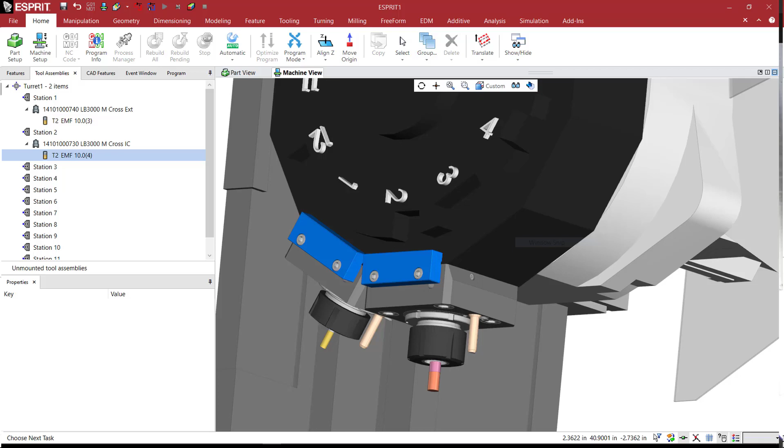Okay, so we're going to create a velocity tool holder. So I just imported this and we're looking at it, and I do not like these colors.

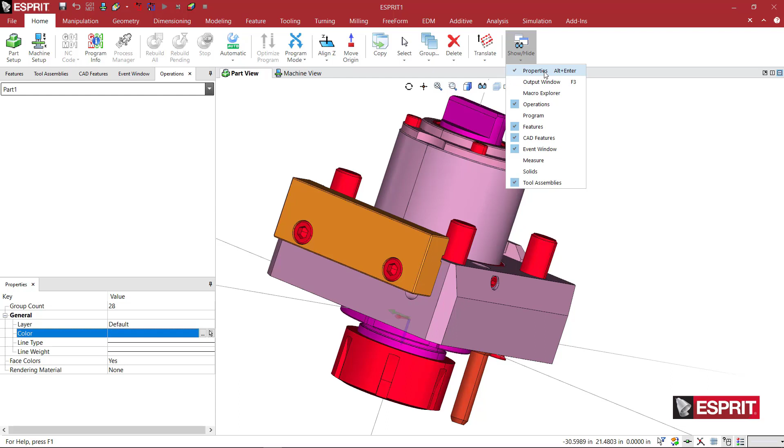So what we're going to do is just right click, select all, and come here to properties—you can view the properties in case you're not aware. Under show hide, you can check properties, or hit Alt Enter. But I'm going to come here and just select gray, and once I do that, my model has been updated to gray.

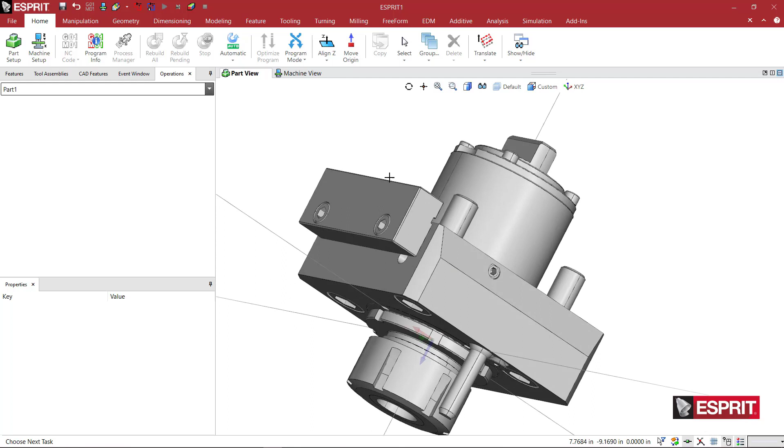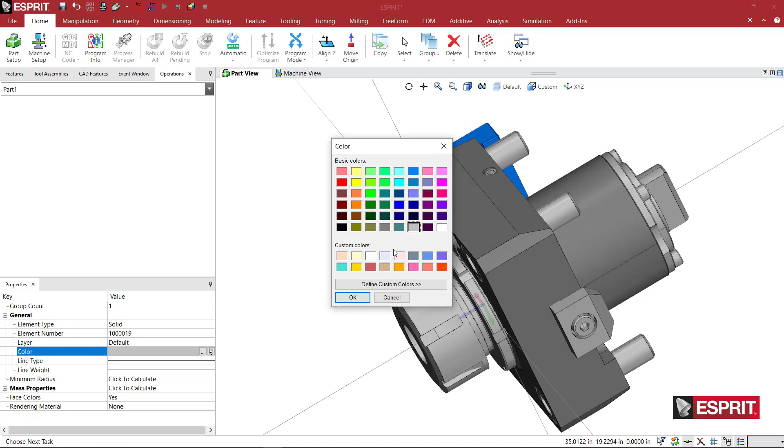Now this is looking a little bit boring, so I want to change some colors from here. Velocity is basically an Okuma product, so what I'm going to do here is make this solid, which is an individual solid, blue, which looks like Okuma. Maybe this body, I will darken that. You can come here maybe on the coolant line, and you know, this is probably going to be brass, so I'm just going to pick one of these colors here. And then on the collet nut, I will come in here and pick like a darker gray.

So that looks pretty good right there. I'm liking that.

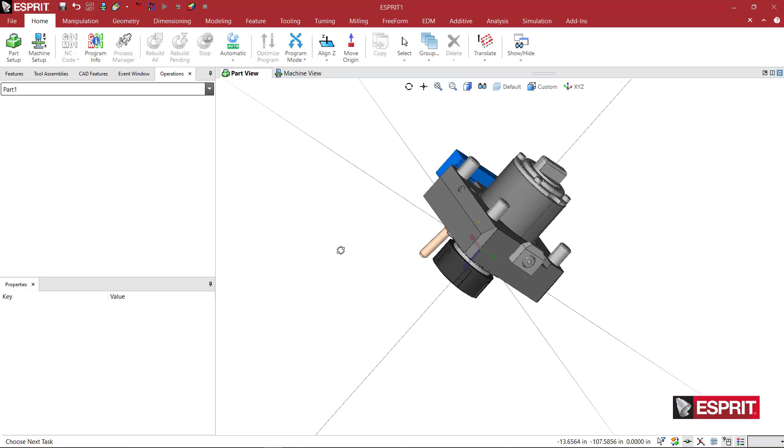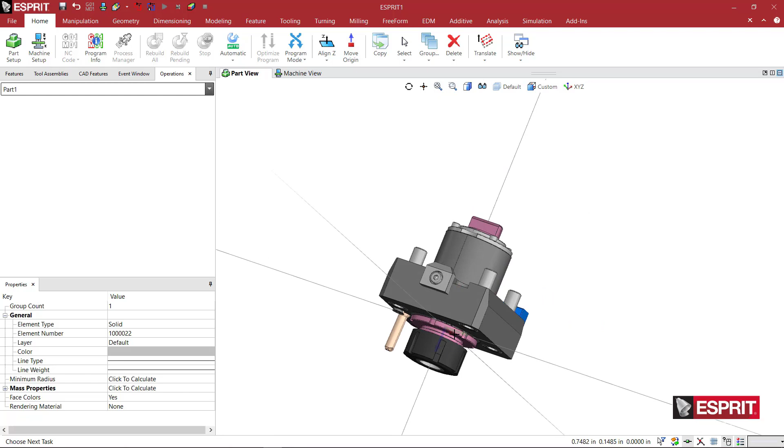Now, some of these are pretty detailed, and these models from Velocity have a lot of extra models in here that are just going to make the file larger—stuff like this, which is going to be up in the turret, so we don't need to keep a lot of these things. So looking at it, if I look at this solid here, this extends through and it's something that's going to be visible, so I want to keep that one. But here, this one, there's nothing that's visible, so I'm just going to hit the delete key.

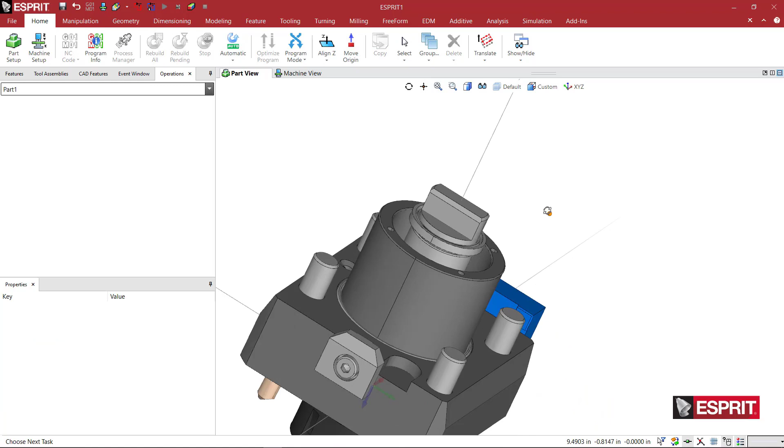These bolts here, we don't need any of these. I'm going to get rid of that one back there—that just kind of trims the file a little bit. What is this one? This one we don't need. And looking down the shaft, we've got a nut in here. We're going to get rid of that. And that's looking pretty good.

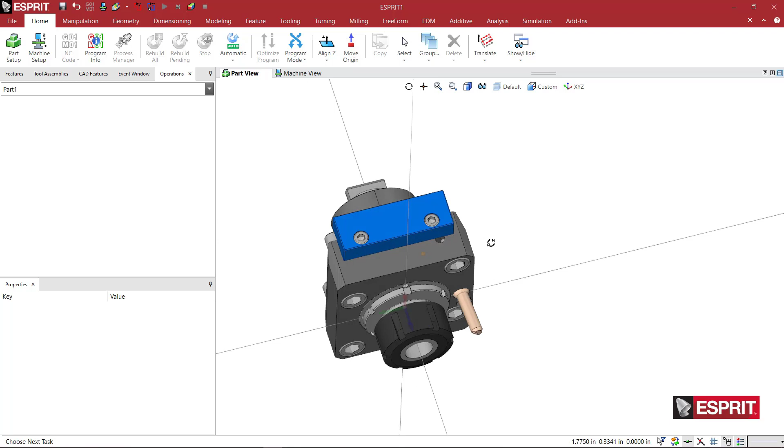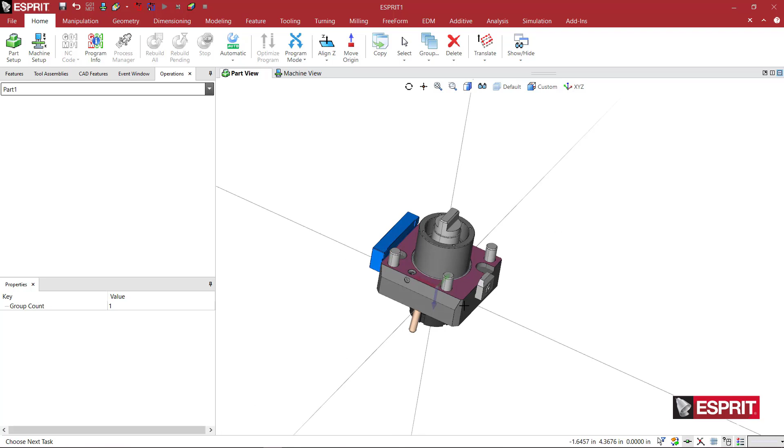Now, you can see here that the UVW positioning of this holder is not correct. This face is going to interface with the flat turret face, so the first thing I want to do is make sure the blue is pointing up into the turret, and the XY plane here is actually zeroed out at this face.

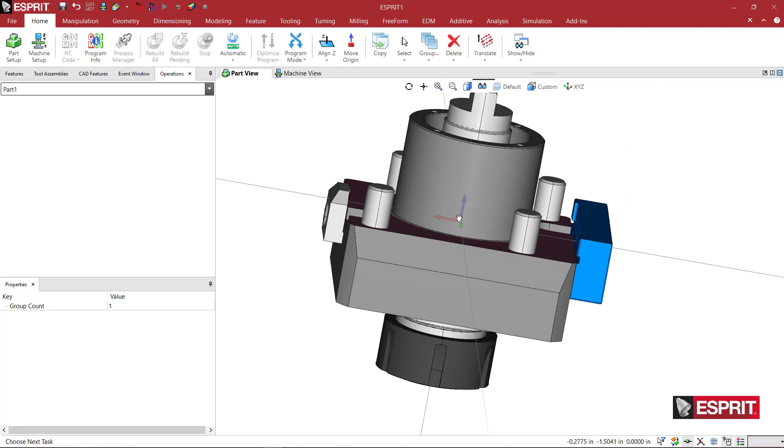So to do that, we're going to use this function here, Align Z. And when I go ahead and click on that, we now see that my XY plane is positioned at the zero point at this face, and my blue vector, indicating the direction into the turret, is correct.

So that's looking good, but I'm not really sure exactly where this model has been positioned by the guys that did the CAD work. So I'm going to pick one of these circular faces here, and I'm also going to hit Align Z one more time, and that is going to center this about the Z-axis, so it's going to slide up into the turret bore correctly.

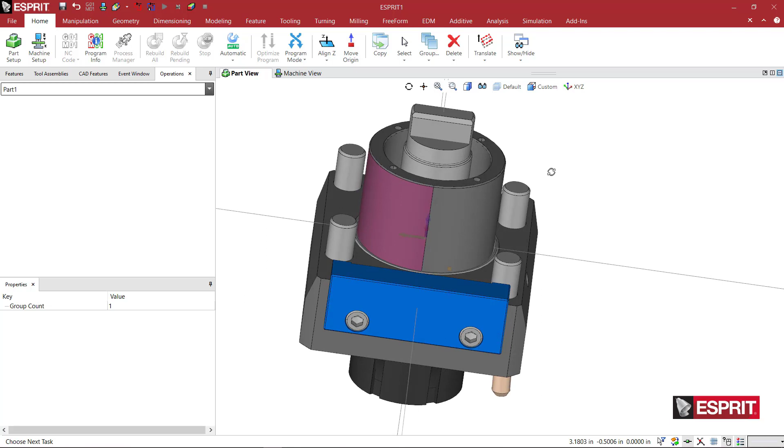Now, usually when I see people's machines and stuff, this is going to be facing toward the main. This direction, this red direction, is going to point toward the main, so it's actually going to be pointing toward the sub.

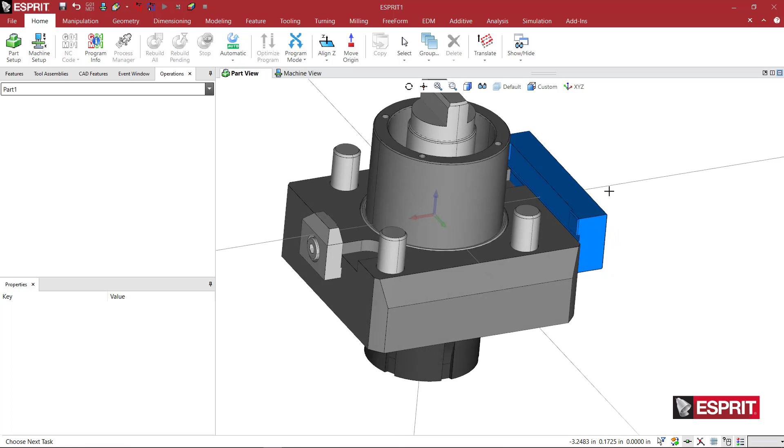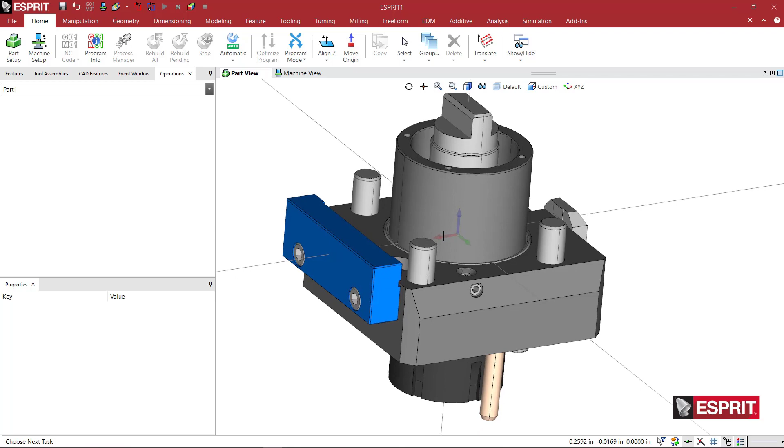So what I'm going to do is just hit right click and say select all, right click again, pick translate. I'm going to select rotate, then move, do a 180, and say OK. So now the red vector indicating toward the main is showing this blue block pointing at the main spindle.

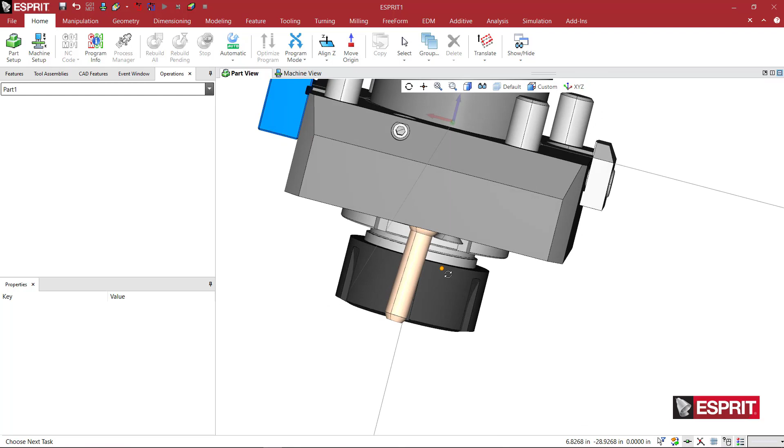And at this point, I want to create my tool spindle axis. Since my solid is correctly positioned now, my tool vector is also in the same orientation as this holder, because this is a radial holder. So what I'm going to do here is just zoom in on the face of this collet nut.

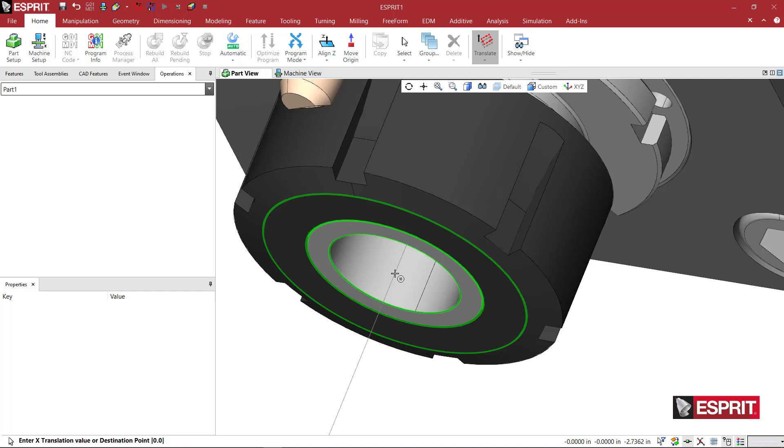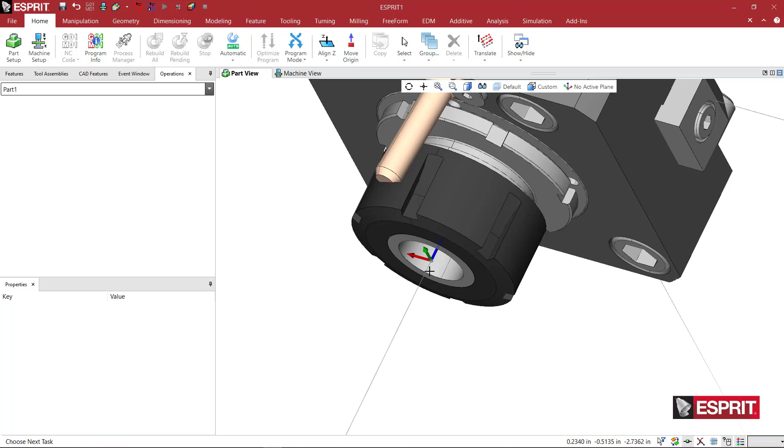And I'm going to pick my translate command. You can pick any of these commands here. I'm just going to pick translate, and then when I move my mouse near the center at the face of this collet, it's going to highlight that. When I digitize with the mouse, it's going to translate my UVW to that center position, even with the face of the collet. So when I create a tool, it's going to appear with the base of the shank right here, with the overhang of that tool, the stick out coming from the face of that collet.

So now what I want to do is just define that using TSA. I did a TSA_1 for tool spindle axis. And really for this holder, you're only going to have the one.

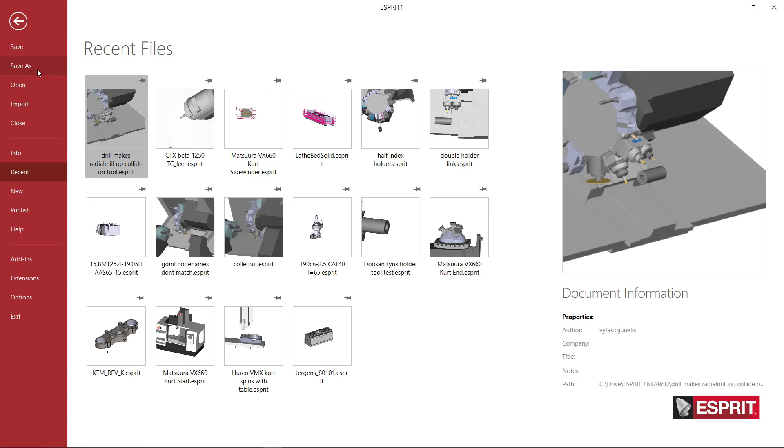And then I'm going to come to File, Save As, and we're going to do a GDML for a holder type. Holder files, GDML. We're going to add it to this folder right here. So we've got an internal collet, an extended collet. We're going to go Save.

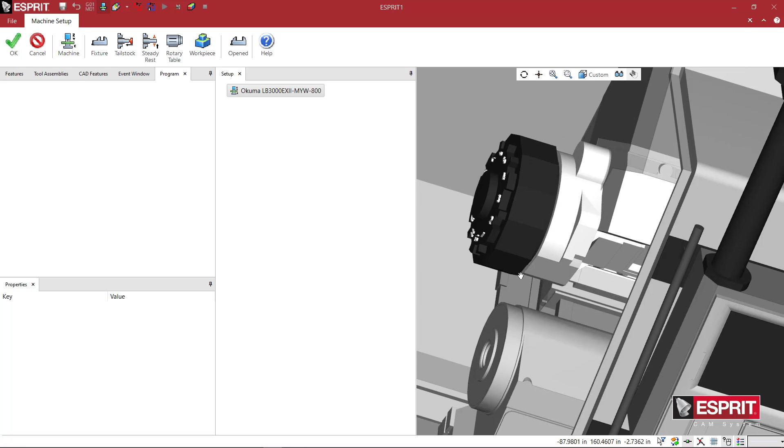And now, if I go to the machine view and load a machine, we're going to bring in my LB3000 and zoom in on the turret here. We're going to turn off these outside elements so that we can see the turret really nicely. I'm going to say OK, and come to Tool Assemblies right here.

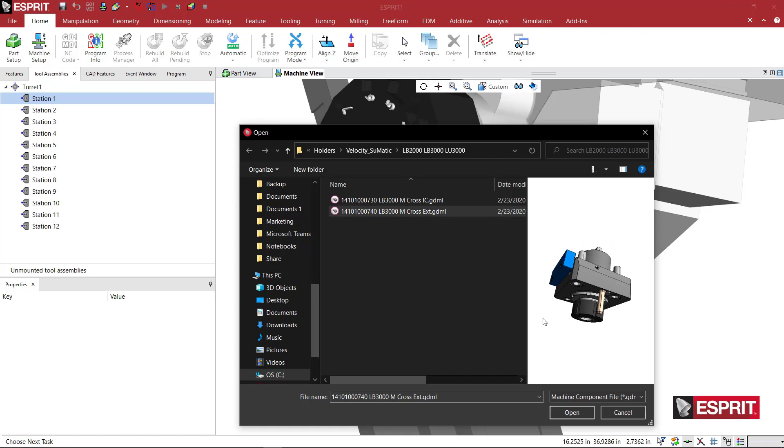I'm going to right click on Station 1. I'm going to add the one that we just did, which is this EXT. You see the preview looks good. I'm going to say Open. And my tool holder appears.

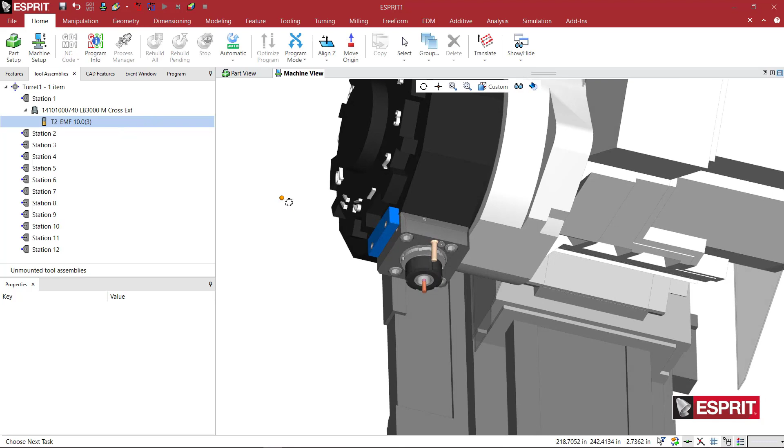And let's go ahead and create a tool here. I say OK, add a milling tool, end mill. Just going to take the default end mill here. So we see that the holder face has interfaced with the flat turret face at Station 1 because I added it to Station 1. And you see that my tool appears right at the center of the face of that collet nut, which is exactly where I defined that TSA.

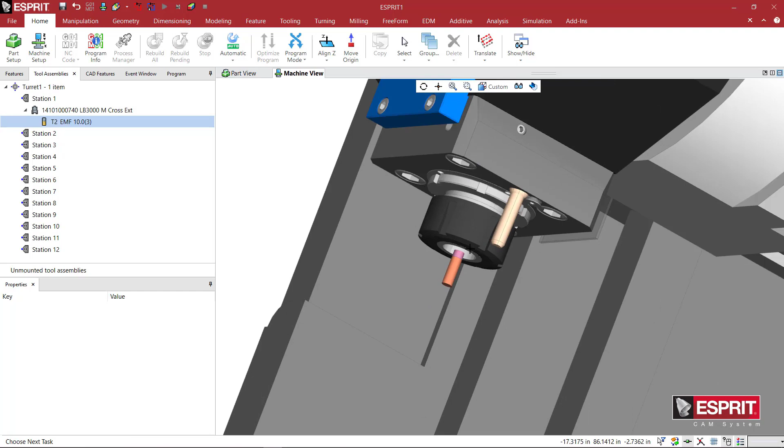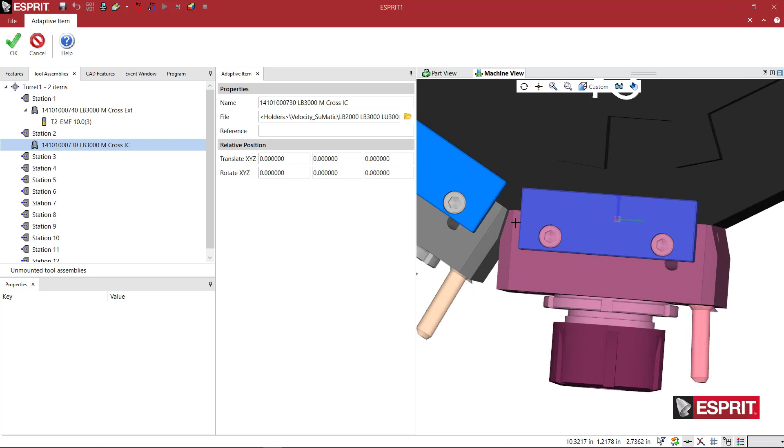And I can add an additional one, the one that I did earlier. That one is going to appear on Station 2. And you can see they're slightly different, but they interface nicely with the turret and with each other. They're going to be displayed on the machine exactly like they would be mounted on the machine in real life.

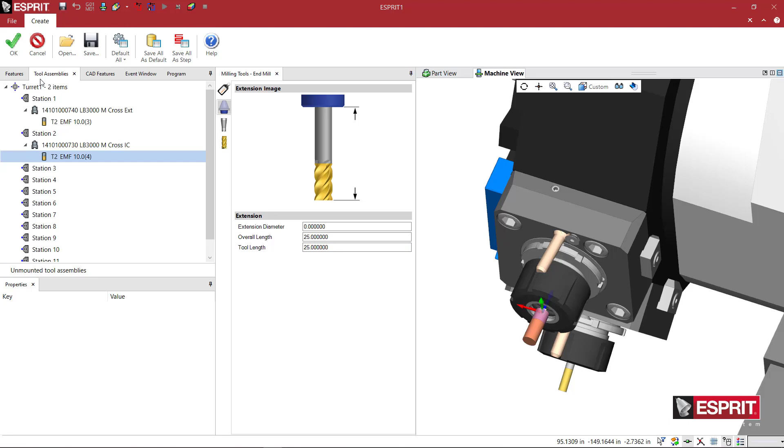So maybe I want to add, let's see, make this a 10 millimeter, make it a little bit longer. We'll just go to the overall length here. We'll do 25 for this one. Say OK. And there we go. We've got a couple of really sweet looking Okuma blue branded Velocity tool holders on Station 1 and 2.

That is how you do it.